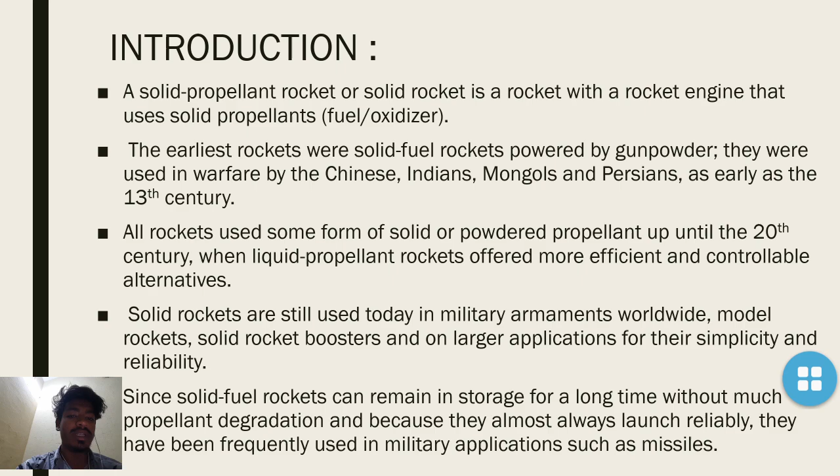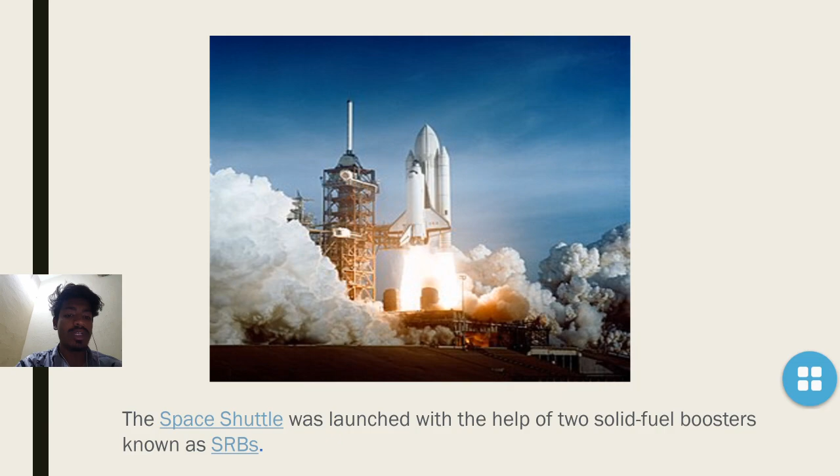So, solid rocket engines use fuel and oxidizer as a propellant, and these were used earliest in the 13th century by Chinese, Indians, Mongols, and Persians. And all rockets used some form of solid or powdered propellant until the 20th century. Here you can see an example of this. The space shuttle was launched with the help of two solid fuel boosters known as SRBs.

Propellant families: black powder propellant, gunpowder, zinc sulfur propellant, candy propellant, double base propellants, composite propellants, high energy composite propellants, composite modified double base propellants, minimum signature smokeless propellants, electric solid propellants.

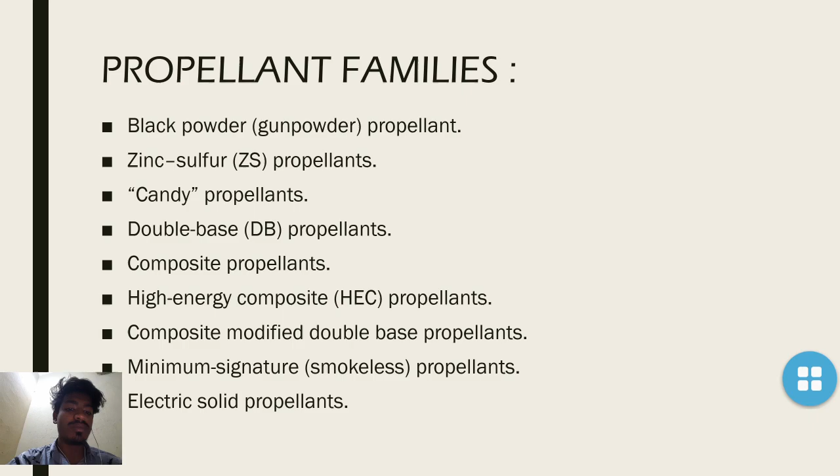So, black powder propellant. Black powder is composed of charcoal as fuel, potassium nitrate as oxidizer, and sulfur as fuel and catalyst. It is one of the oldest pyrotechnic compositions with application to rocketry. In modern times, black powder finds use in low power model rockets such as Estes and Quest rockets, as it is cheap and fairly easy to produce.

The fuel grain is typically a mixture of pressed fine powder into a solid hard slug with a burn rate that is highly dependent upon exact composition and operating conditions. The performance or specific impulse of black powder is low, around 80 seconds. The grain is sensitive to fracture and therefore catastrophic failure. Black powder does not typically find use in motors above 40 newtons, 9 pounds force.

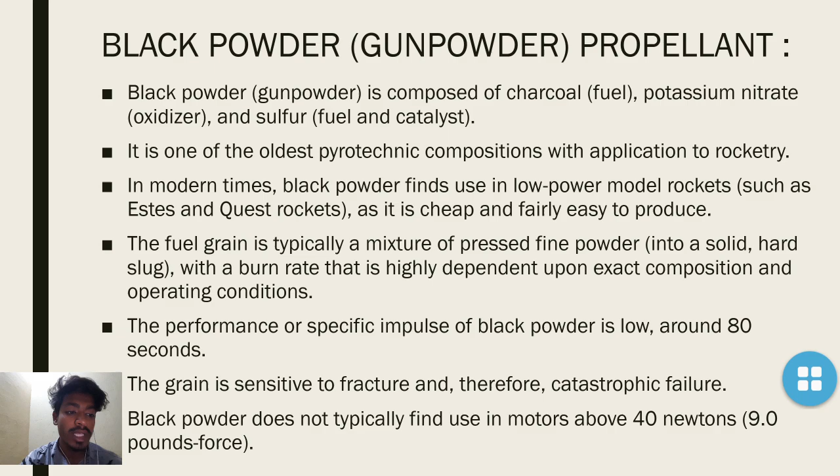Zinc sulfur. Composed of powdered zinc metal and powdered sulfur as oxidizer. Zinc sulfur, also known as micrograin, is another pressed propellant that does not find any practical application outside specialized amateur rocketry circles due to its poor performance, as most zinc sulfur burns outside the combustion chamber, and fast linear burn rates on the order of 2 meters per second.

Zinc sulfur is most often employed as a novelty propellant as the rocket accelerates extremely quickly, leaving a spectacular large orange fireball behind it. Candy propellant. So, candy propellants generate a low-medium specific impulse of roughly 130 seconds, and those are used primarily by amateur and experimental rocketeers.

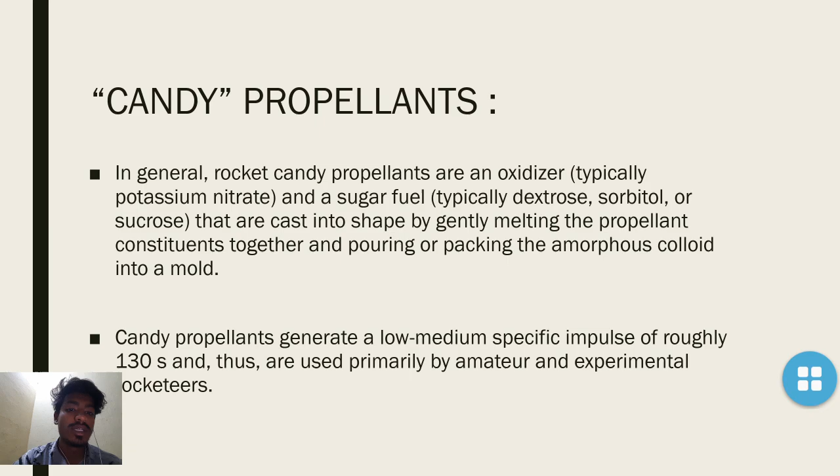Double base propellants. DB propellants are composed of two monopropellant fuel components, where one typically acts as a high energy monopropellant and the other acts as a lower energy stabilizing monopropellant. So double base propellants are of two monopropellant fuel components, of which one typically acts as high energy and the other one acts as lower energy stabilizing.

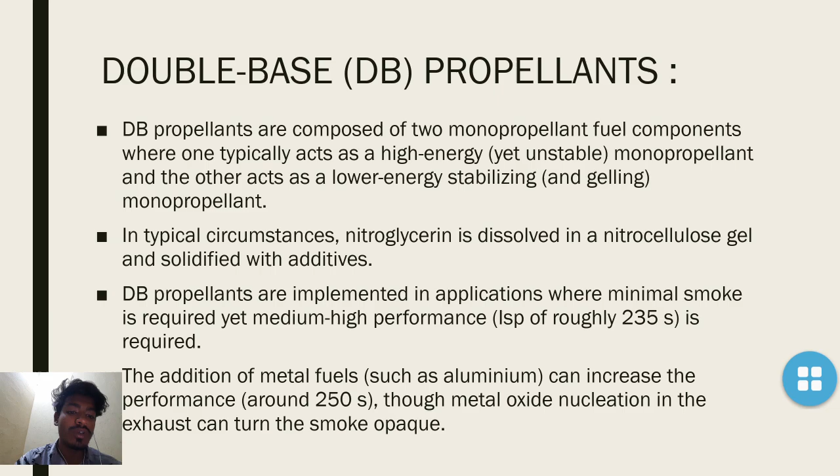In typical circumstances, nitroglycerin is dissolved in nitrocellulose gel and solidified with additives. The addition of metal fuels can increase the performance to around 250 seconds, though metal oxide nucleation in the exhaust can turn the smoke opaque.

High energy composite propellants. Typical HEC propellants start with a standard composite propellant mixture and add a high energy explosive to the mix. This extra component is usually in the form of small crystals of RDX or HMX, both of which have higher energy than ammonium perchlorate. Despite a modest increase in specific impulse, implementation is limited due to the increased hazards of the high explosive additives.

Electric solid propellants. Electric solid propellants are a family of high performance plastisol solid propellants that can be ignited and throttled by the application of electric current.

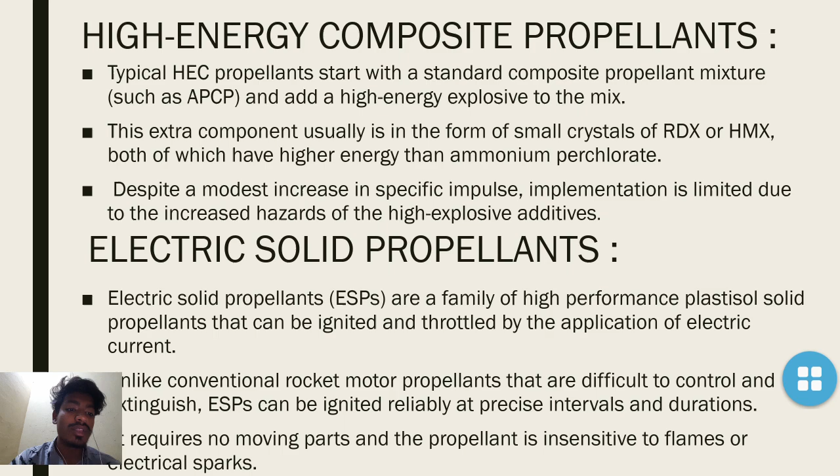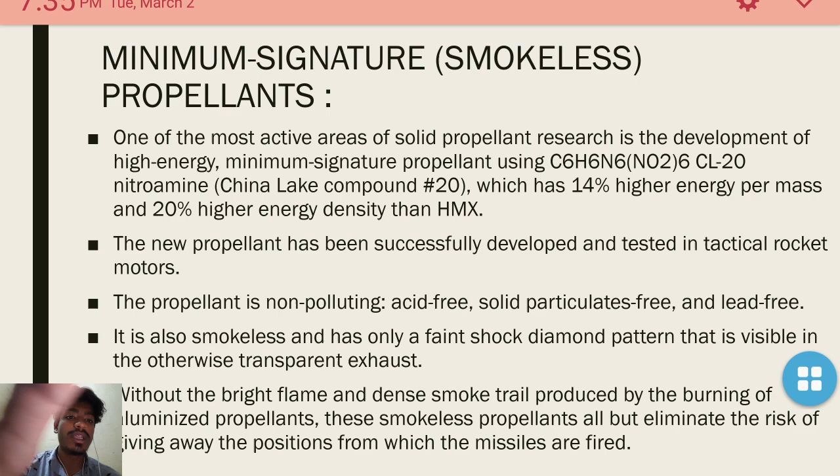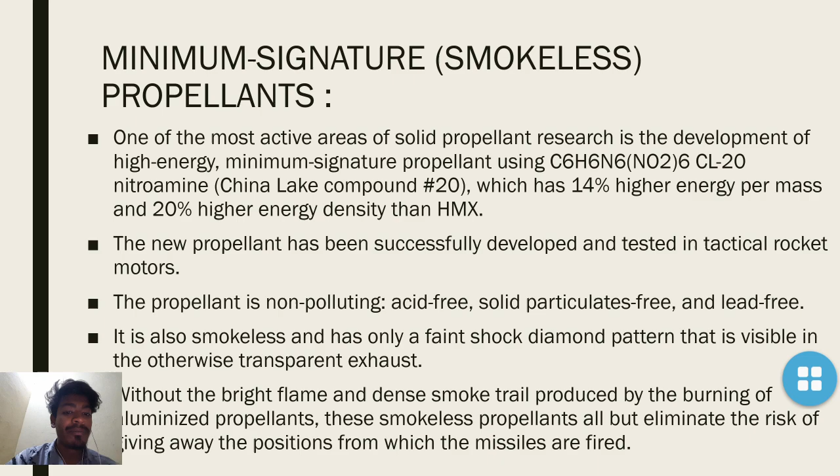Minimum signature propellants. It is one of the most active areas of solid propellant research, for development of high energy minimum signature propellant using the C6H6N6 formula nitroamine, which has 14% higher energy per mass and 20% higher energy density than HMX. So the new propellant has been successfully developed and tested in tactical rocket motors. The propellant is non-polluting, acid-free, solid particulate-free and lead-free.

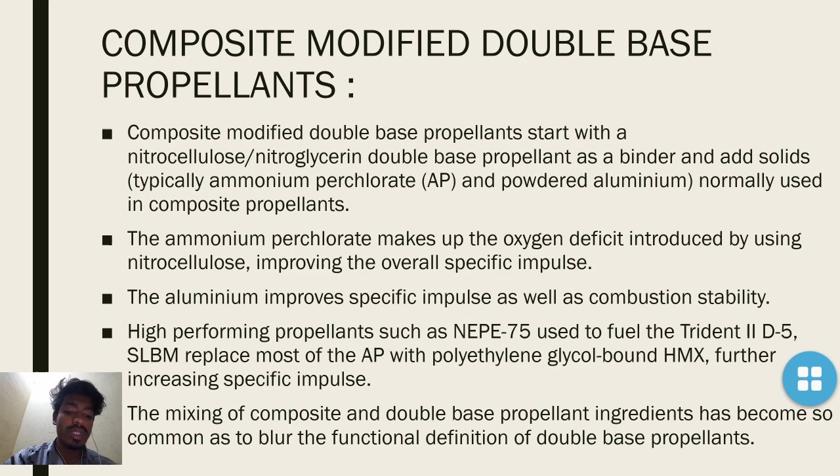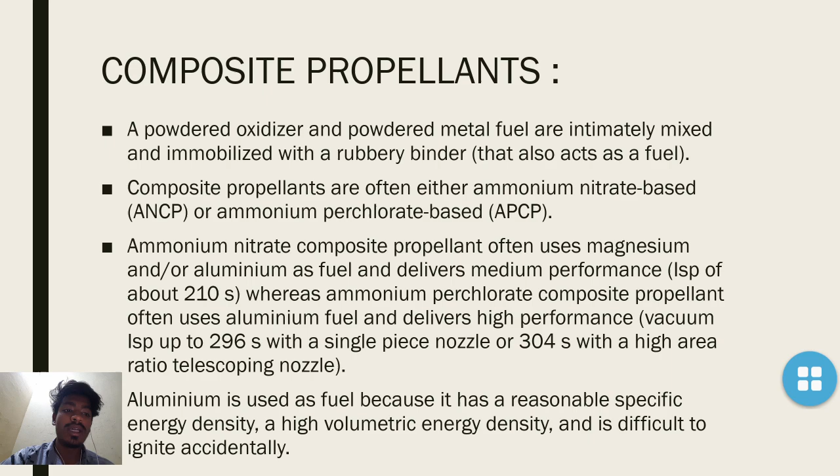Composite modified double base propellants. So composite modified double base propellant starts with a nitrocellulose nitroglycerin double base propellant as a binder and adds solids normally used in composite propellants. Composite propellants are a powdered oxidizer and powdered metal fuel which are intimately mixed and immobilized with a rubbery binder. They are often either ammonium nitrate based or ammonium perchlorate based.